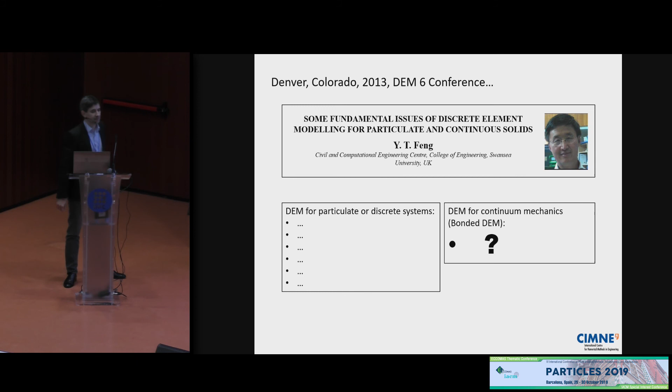But when he reached the part about continuum mechanics, the part which is solved by what we call the bonded DEM, he wrote a big question mark. He didn't talk much about that, just trying to say that there was many things to be developed there.

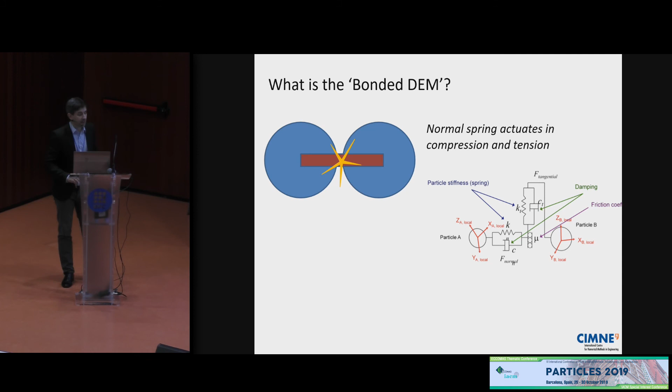At that time, we were trying to implement the bonded DEM in CIMNE. What is the bonded DEM? Basically you have the standard DEM with this typical model with normal spring, tangential spring, some dampers, and friction, but you also have what we call the bond, which acts in tension as well, not only in compression. Eventually it can break, and from that moment on you have the standard DEM. That's what we call, in general, the bonded DEM.

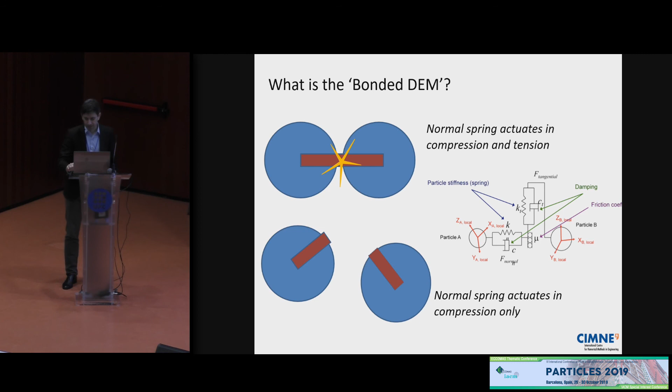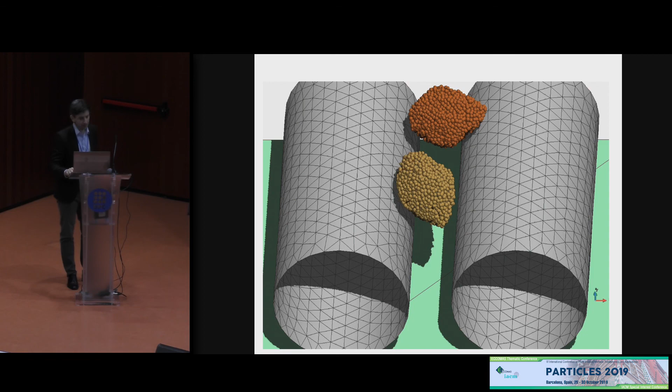It's useful to model things like concrete or solids that break and roll, so you have big displacement, rotations, and everything. You have contact, you have everything, but also you have the behavior of a solid before it breaks. We can break solids, and after that they break again, etc. So you can model crushing, etc. Those are some academic examples.

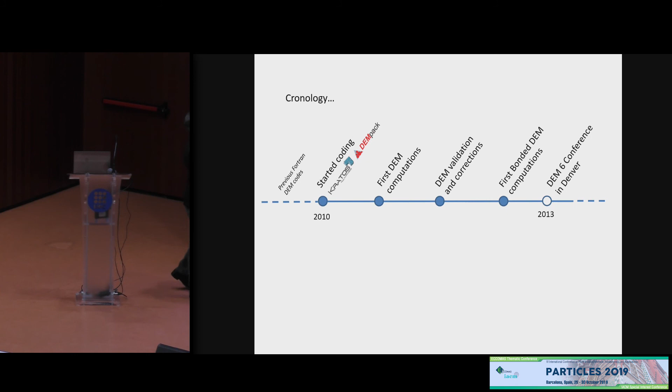The thing is that we had Fortran DEM codes at CIMNE previously. At 2010, we started coding a version of the DEM in the Kratos multiphysics framework. Then we did our first DEM computations. After that, we validated it, we made some corrections, and then we started with the bonded DEM.

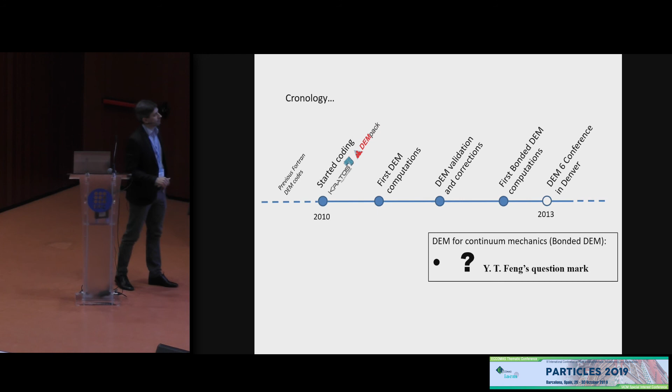That's when I went to Denver and found out that Professor Feng was very critical with the continuous solids simulation. That was the trigger. That made us question some things going on in the bonded DEM.

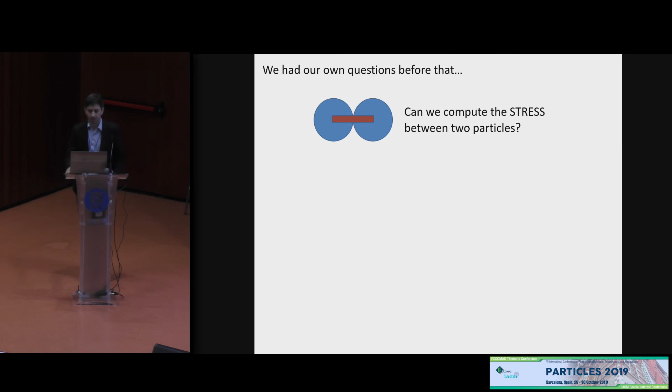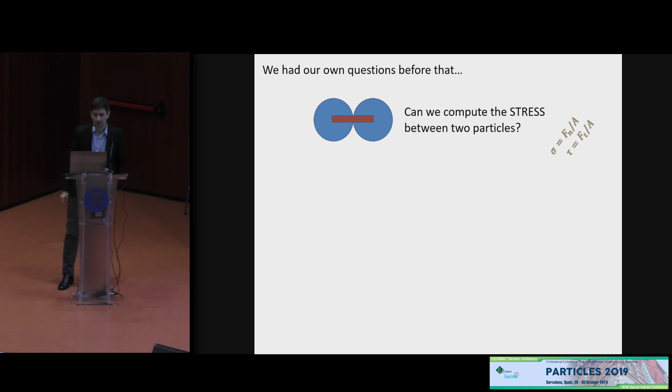What are some questions that we had before that time? We were questioning, can we compute the stress between two particles that are bonded? You can find in the literature many papers and books that say you can compute the normal stress as the normal force divided by the contact area, or the tangential stress as the tangential force divided by the area.

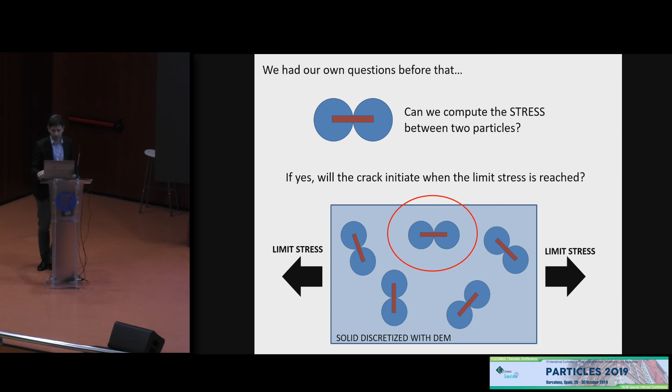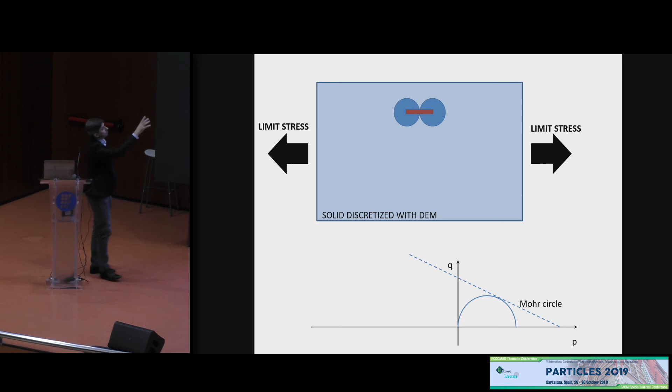But on top of that, if we take the same solid and draw the stress state as a Mohr circle, here you can see it. That's the yield surface for Mohr-Coulomb, and it's touching because it's the limit stress. The circle is tangent to the yield surface.

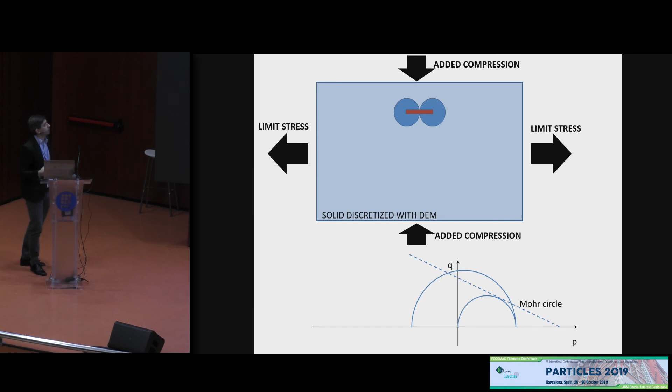But if you add some compression in a different axis, then you have a different Mohr circle. However, the DEM is not aware of that other stress in a different axis. So these questions were coming to our head constantly: how can we reproduce these complex stress states if two spheres are not aware of what is happening around them?

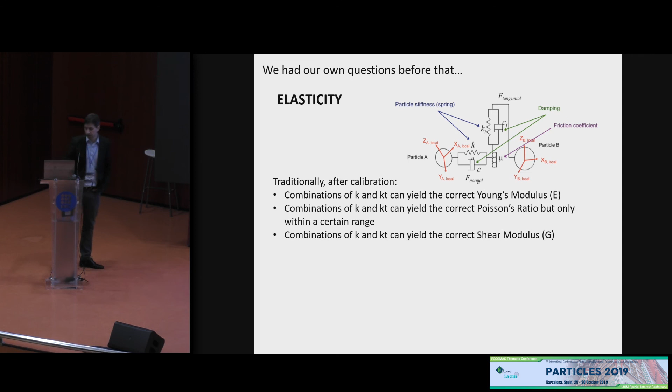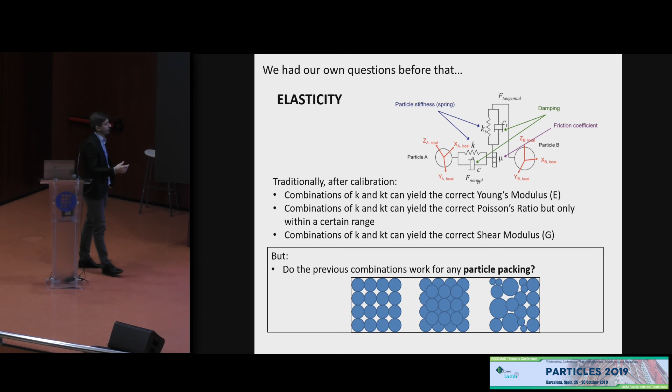However, do these combinations that you find by calibrating work for any particle packing? When I say particle packing, I'm talking about Cartesian packings, staggered packing, random packing, or any packing of spheres you can imagine. And in our experience, the answer is no.

Can those combinations of normal stiffness and tangential stiffness reproduce simultaneously the correct Young's modulus, Poisson's ratio, and shear modulus in different tests. So you do one test for Young's modulus and check it, and with the same calibration, you try a different test to measure the shear modulus. Does that work? And the answer, in our opinion, is no.

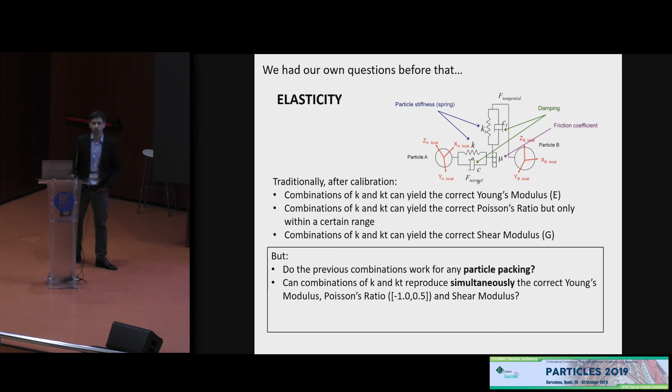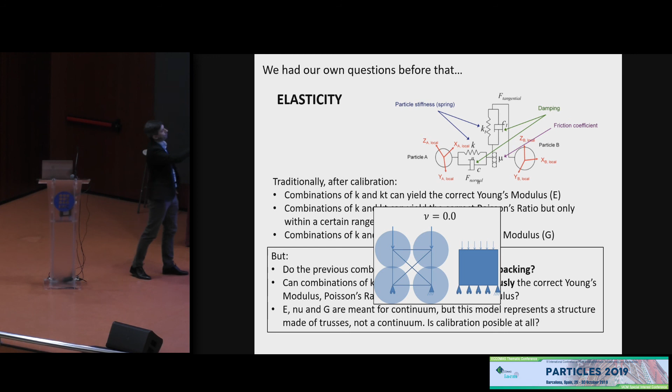Is a structure made of trusses - because the bonded DEM is actually a structure made of trusses - does that behave equal to a continuum? Our answer is no, and probably calibration is not possible. So you can reproduce some states, but not all of them.

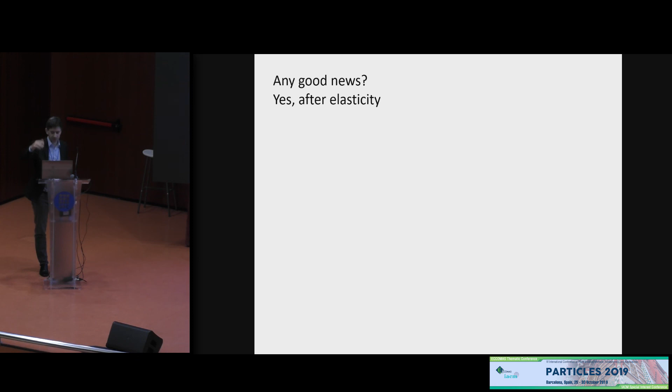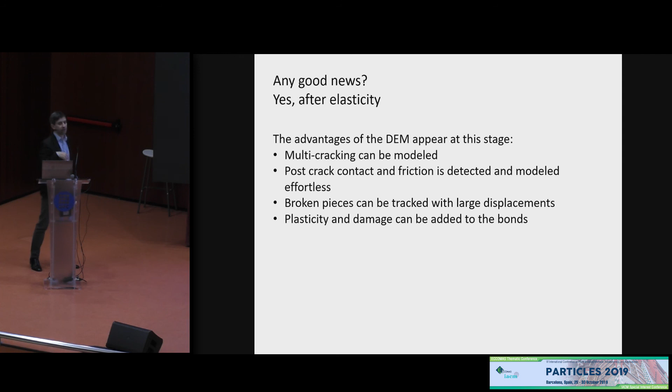So after that, are there any good news? We think that after the elastic range, there are very good news, because the advantages of the DEM appear at this stage. You can have multi-cracking, and after the cracks, the contact and the friction are detected very easily, and it works very well. The broken pieces can be tracked with large displacement, rotations, etc., and you can add plasticity, damage, whatever you want on those bonds. So we should solve elasticity as best as possible.

Of course, the cracks might have started at the wrong points due to a poor accuracy during the elastic region.

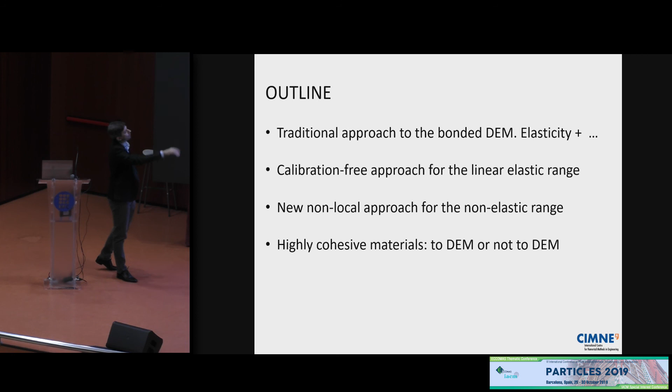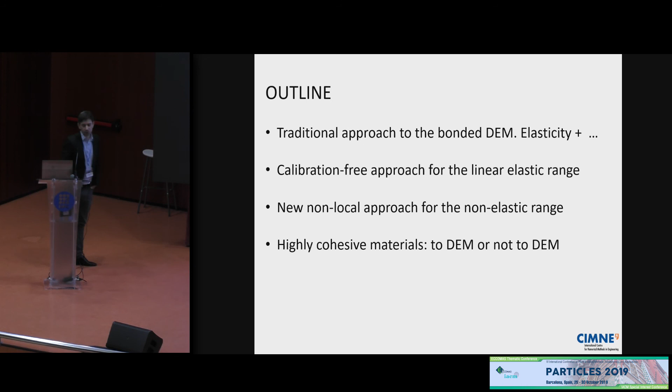Now, I will talk a little bit about the traditional approach to the bonded DEM, elasticity plus the rest. The first idea I want to give you is the calibration-free approach for the linear elastic range. The second idea is a new non-local approach for the non-elastic range, that means after the end of the elastic range. Finally, I will show some examples, and I will try to explain our experience about that.

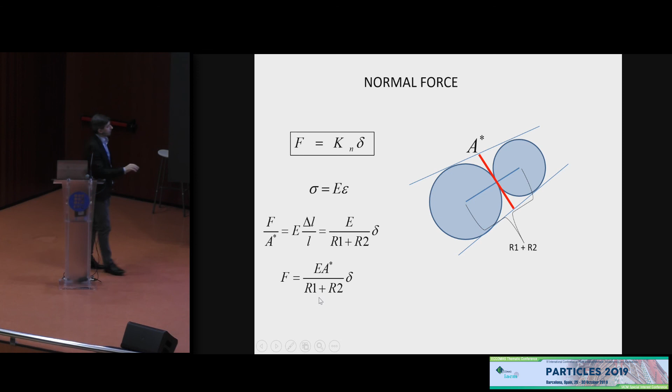So traditionally, we have two spheres. We have a contact area marked in red - that's a 2D simplification. Many authors, like ourselves at CIMNE, chose this equation of elasticity, which says sigma equals Young's modulus times the strain. And then you substitute - can you see? Yeah, the pointer can be seen. Finally, if you do all the substitutions, you get that the normal force is a constant - that's the normal stiffness - times the relative displacement, normal displacement.

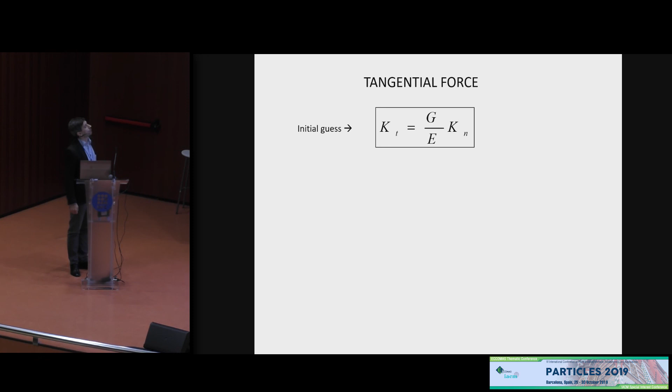Very often, you need to modify the Young's modulus, or if you're using a normal stiffness, to get the proper macroscopic Young's modulus. And what about the tangential force? Well, the first guess would be to use a tangential stiffness, which is the ratio between the shear modulus and the Young's modulus times the normal stiffness.

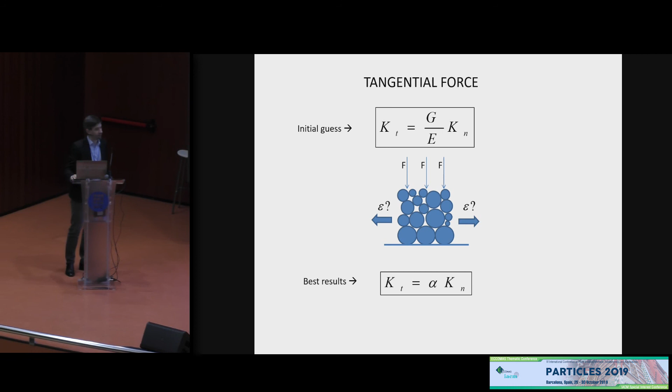But when you have a random packing, for example, and measure the lateral strain, best results are not obtained for that expression, but for other expressions where you have to adapt a little bit a coefficient, and then you finally get the correct Poisson's ratio. Watch out, because modifying the tangential stiffness can also change the elastic modulus, because there is some vertical component of the tangential forces, and then you're modifying the vertical stiffness. So that's dangerous.

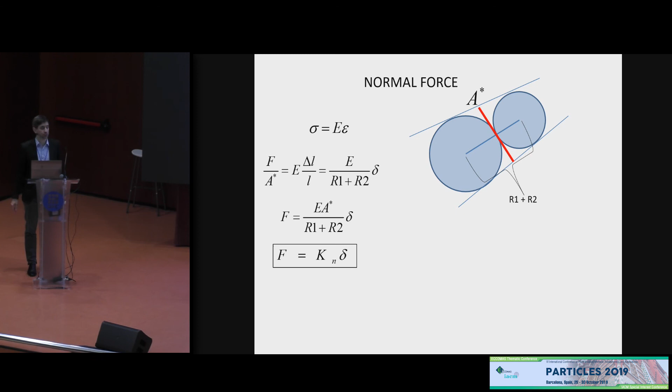Now, what did we do to solve these problems? First of all, we realized that the normal force strongly depends on A, the area. So if you choose a contact area which is bigger, you'll have stronger forces. If you choose it smaller, you have smaller forces. And the thing is that if you draw all the areas, you choose two big areas, you will have overlaps. That means that you are considering that portion of the domain several times.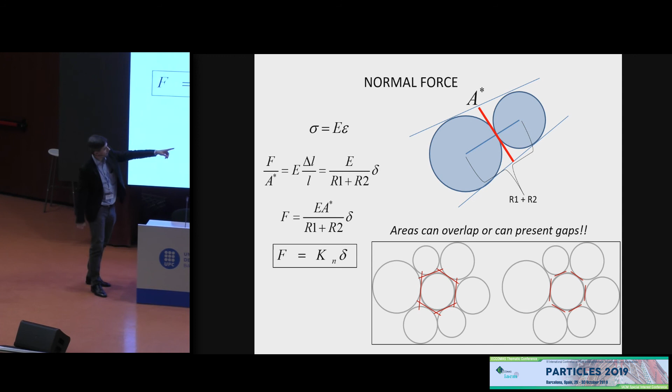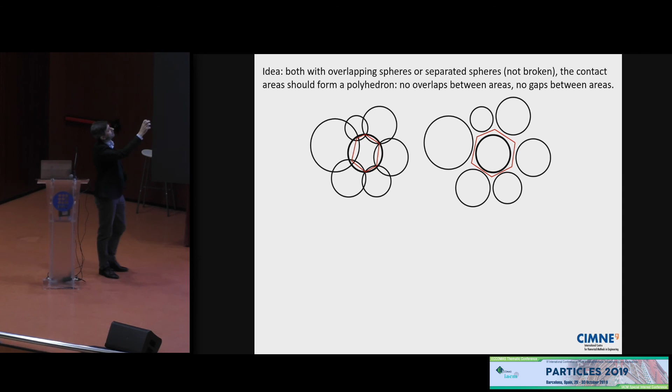And if you choose small areas, then you have gaps - that's like a porous media. We're trying to mimic a continuum right now. So the idea is that the ideal solution would be to have some areas that are touching, but they don't have overlaps or gaps. Even if you have indentations or separated elements, you need those areas not to have gaps or overlap. Our proposal is to use the weighted Voronoi diagram, where all these areas are not overlapping, and you have basically a partition of the domain.

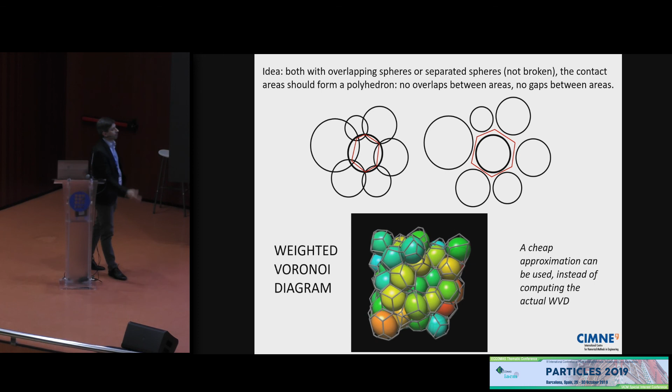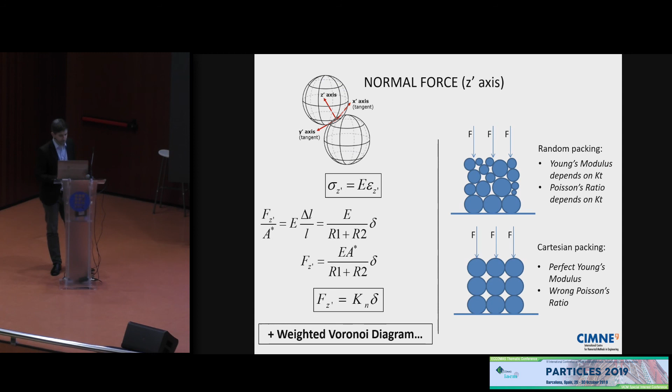We can also use a cheap approximation, particularly to reduce the costs. But conceptually, the idea is the same: try to use these areas as the area to compute the elastic stiffness. Now if you use this scheme and add the weighted Voronoi diagram to compute these areas...

If you use a random packing, you'll still get a wrong Young's modulus, because it still depends on Kt, and a wrong Poisson's ratio. But if you use a Cartesian packing, that's good news - you get the perfect Young's modulus. That's some beginning, but still a wrong Poisson's ratio.

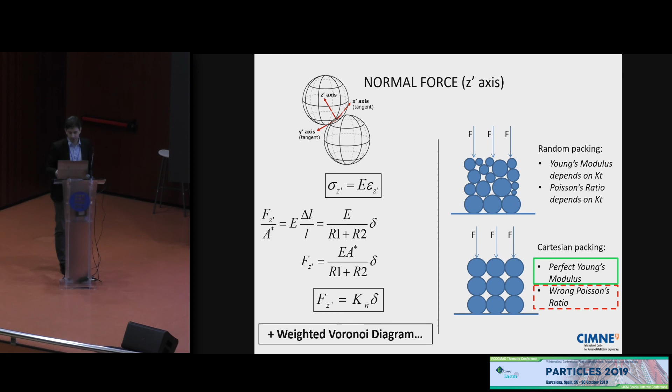So let's work on that red square. The idea is to change these equations, and instead of using a 1D elasticity equation, we will use a 3D elasticity equation, because it's a 3D problem.

Now if you do the same substitution, exactly the same step, you end up with a formula that tells you that the normal force between two spheres is something which is in the traditional DEM plus an extra term which depends on the stresses in the surroundings of that bond.

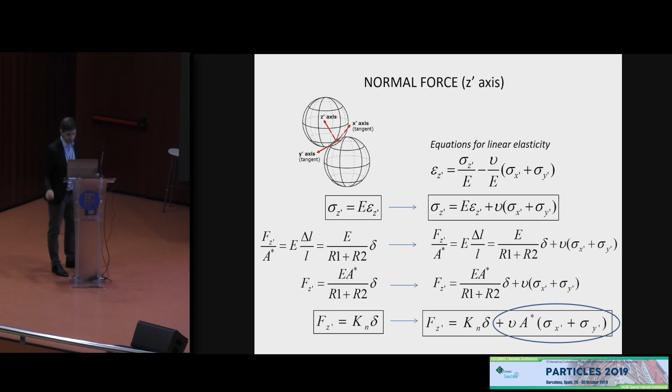And how can we fill that term? Well, the stresses are known. Traditionally in the DEM, they have been used to plot results. We have seen many talks in the particles conference, previous particles conferences, where people draw the stresses. So our idea was to use those stresses to feed that term.

And of course you have to project it, because you have to add the stress in this direction and the stress in this direction. So the global stress tensor, you have to project it to these directions using these formulas. That's only a projection in those directions, so you can fit the extra term that you have on top.

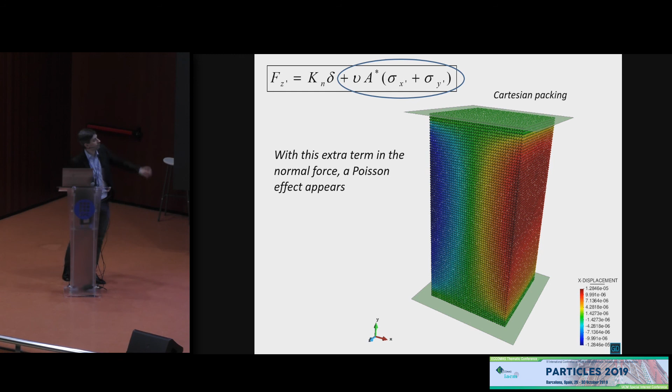Okay, when we did this with a Cartesian packing, we recovered the correct Poisson's ratio. That's the first time I see that, because usually in order to get some Poisson ratio, some lateral strain, you need to have always some random packing, or at least staggered packing. But that's done with the Cartesian packing - they are columns of spheres, and they are still expanding thanks to that term.

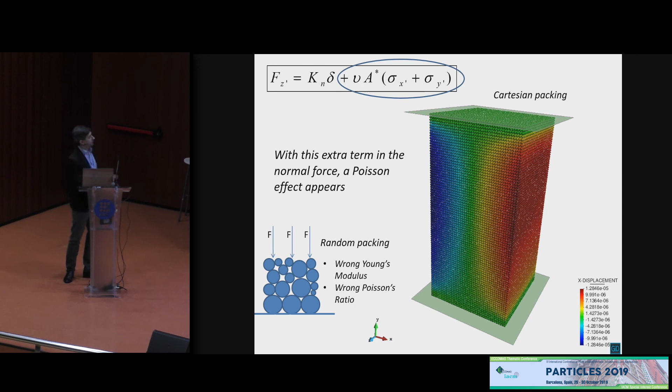However, for the random packing, we are still depending on the tangential stiffness. So we are getting a wrong Young's modulus and a wrong Poisson's ratio.

Well, let's do the same then with the tangential force. We take the equations for linear elasticity for the tangential stresses, that's the expression of the continuum, and we do the substitution.

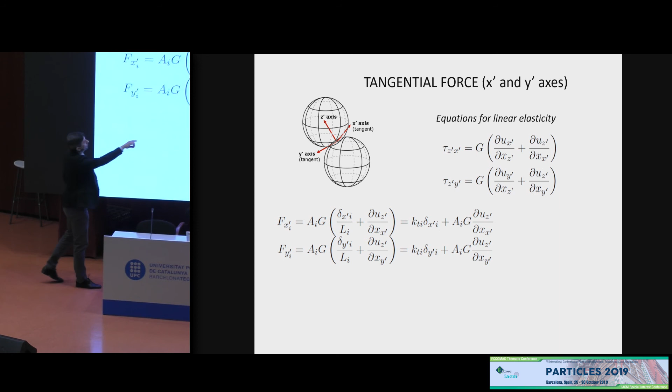Here we have that the forces in the lateral directions are some AG, and the two derivatives we are substituting in the same fashion that we do for the normal direction, and we need this term, the last term - these two at the end of the formulas - which are basically a measure of the shear strain along the bond, which is something that you cannot get from two spheres. That's impossible.

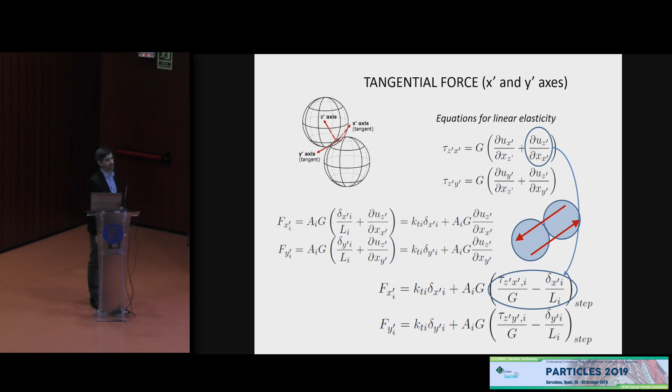So we feed that with the information coming from the stress tensor. It's the same idea - so there we substituted those derivatives, here is marked. Those derivatives are substituted by an expression which uses the stress tensor, which has a lot of information from the surroundings.

When we did this, we used the expression for the normal force with the extra term and the tangential forces with the extra terms as well. And also, here we realized that the Kt, the tangential stiffness, is not changing - it's fixed with the value of AG divided by L. Then we...

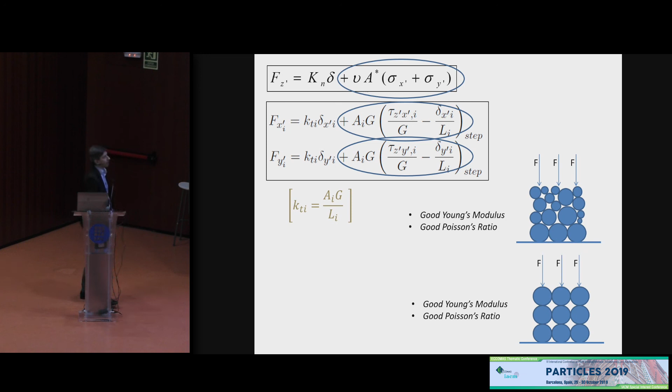...achieved what we wanted: a good result for the Young's modulus and Poisson ratio, for any packing basically - random packing, Cartesian packing, and staggered packing. Those are the tests that we did in the publication.

And we can see here, for example - let's see if the mouse works well - yeah, this error is what you get when you use the standard DEM, 100% error. But if you use the extra terms with Cartesian fine packing, you get only 1.5%. For staggered packing, you go from 43% to 0.4%. And for random packing, you go from almost 30% to 3%. So there's still some kind of heterogeneities that are putting some error, but at least we were very happy that we could capture those elastic properties without calibrating.

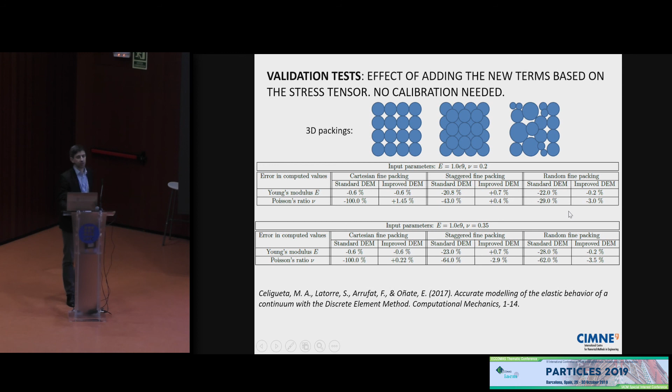So basically, you put the Young's modulus and the Poisson ratio in the formulas, and you're capturing the correct behavior in the bonded DEM. Are there problems?

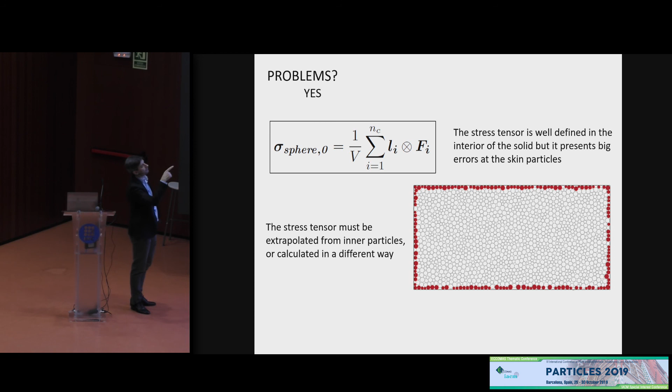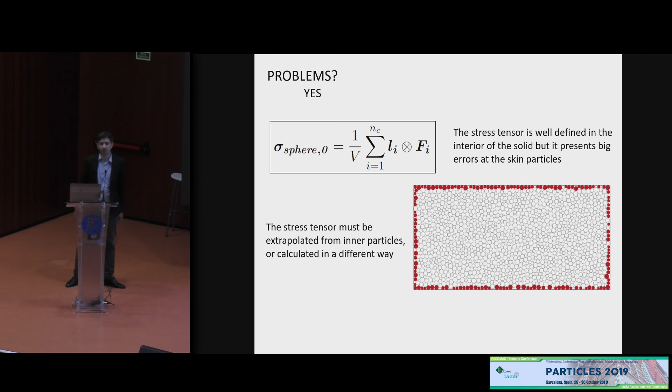Yes, there are problems. The stress tensor is well defined in the interior of the solid, but it has big errors on the skin, because it's based on the divergence theorem, and you cannot do the whole integral in the surroundings of one sphere which is in the skin. So you have to extrapolate it from the inner particles, or calculate the stress tensor in some other manner. Skin particles are problematic.

Some kind of heterogeneity can appear, though that's only about a 3% error that we have. And it has, of course, like most DEM simulation, a large CPU cost compared to finite element, for example.

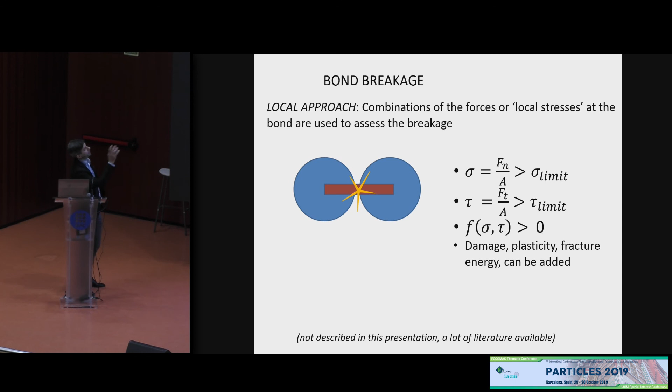Now, the second idea is about the non-elastic range. Usually, for breaking the bonds, we use the local approach. That means combinations of the forces or the local stresses at the bond, and you compare them with the limit. For example, you compare the normal stress to a limit stress, and if that's bigger, you break the bond, or a tangential stress, or a combination of both.

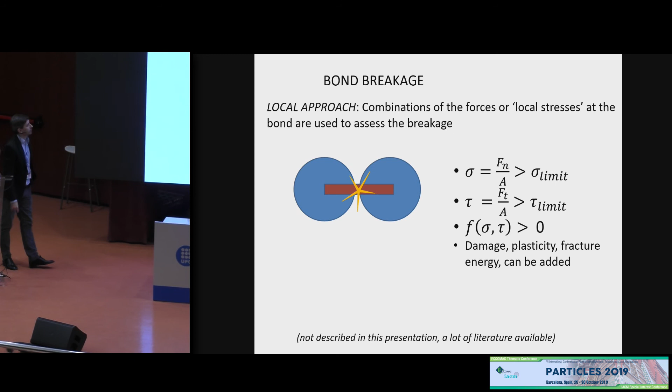You can add damage, plasticity, fracture energy—those things can be added to the bond, and that's pretty useful. However, our idea is to use typical yield surfaces from continuum mechanics, for example Rankine's yield criterion. Our proposal is to use a non-local approach.

The full stress tensor can be used. We have it—that's the formula I put before, and that's the value we are feeding into the forces formula.

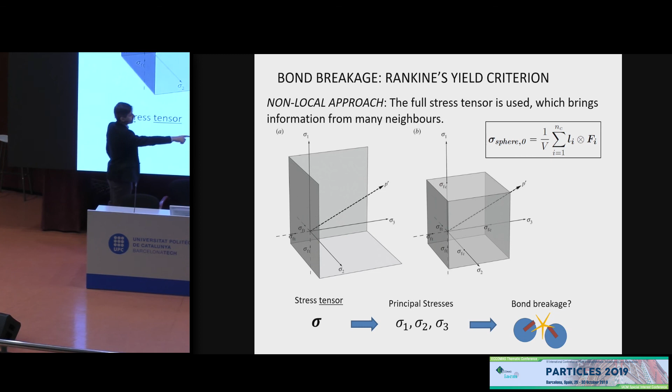So you have the stress tensor, you can compute the principal stresses, and with the principal stresses you can assess if you are inside or outside the yield surface. Those are two different expressions of Rankine, with a limiting compression and a limiting tension.

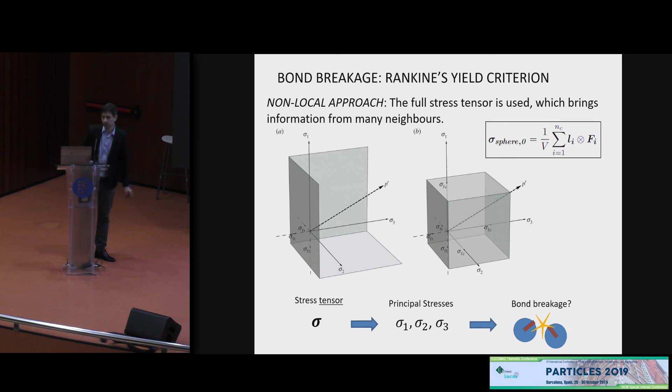But the thing is, with those principal stresses, you can say if the bond is breaking. This is a very simple idea, but...

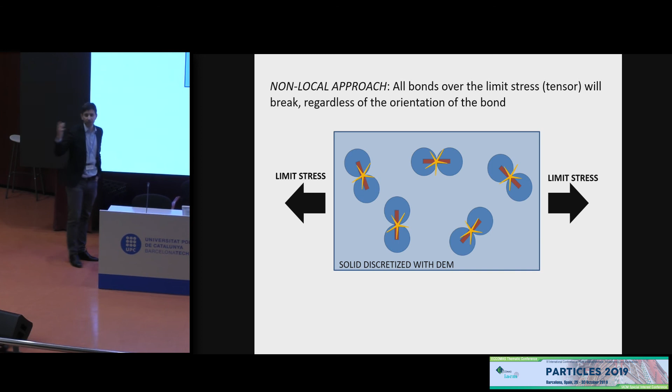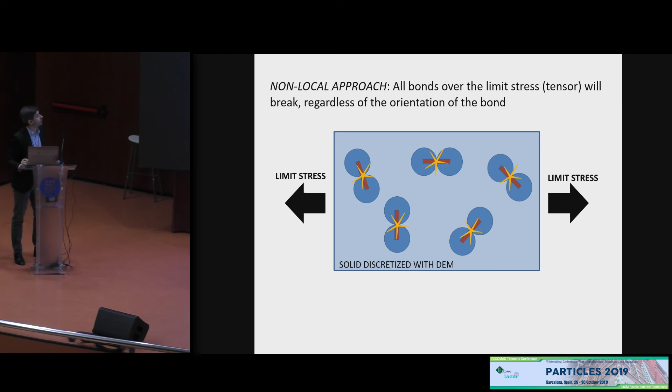if you put the solid under limit stress, all bonds should break at the same time, regardless of the orientation of the bond. We said at the beginning that orientation was important when using local stresses along the bond, but here, using the stress tensor, it doesn't care about the orientation of the bond. So all of them, apart from heterogeneity that could appear, can break at the same time.

Those are some validation tests we did, with uniaxial compression strength test, the Brazilian test, and the shear test. The results were quite good after calibrating just one parameter.

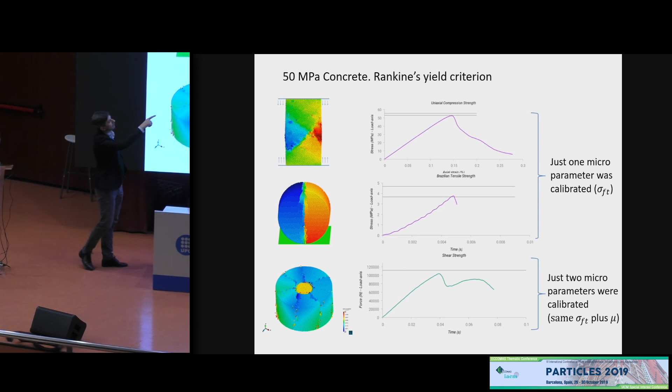For the UCS and Brazilian test, we only needed to calibrate one parameter. Elasticity was done correctly, automatically, and the limit stress for the Rankine yield surface had to be calibrated, and after three or four attempts, we got it.

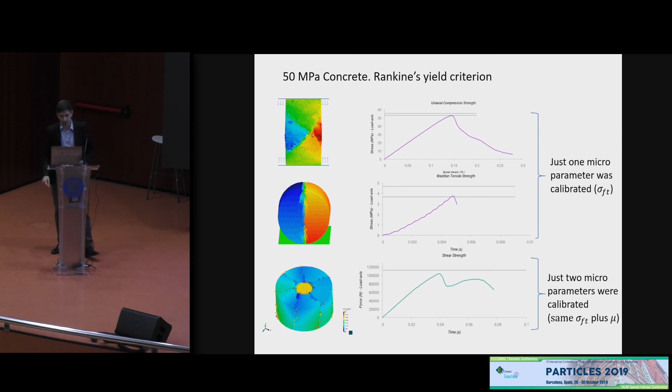However, this is a very frictional case, and we had to calibrate also the friction between particles, using exactly the same value for sigma ft that we were using for the previous calculation. That was very good news.

But we said, okay, if we can do this with a Rankine yield surface, why not Mohr-Coulomb, Drucker-Prager, Tresca, von Mises, whatever you have used traditionally?

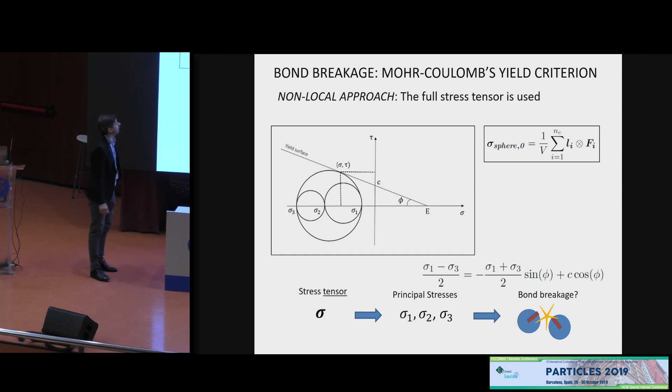Well, we tried Mohr-Coulomb, and the concept is the same. You have this yield surface, you have the stress tensor at the point, you take the principal stresses, you can operate with them and assess if the bond is breaking.

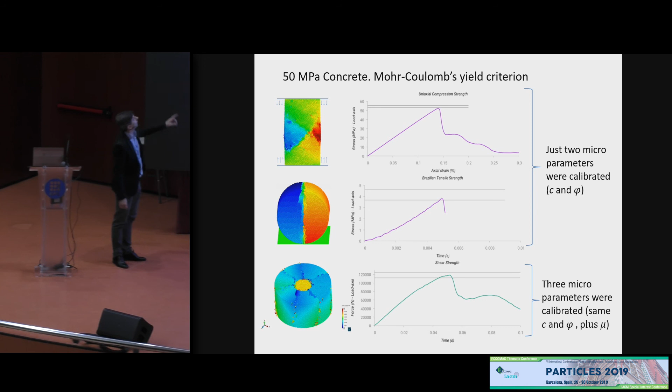Then the same thing—bonds are breaking regardless of the orientation. Those are the results comparing with experiments for the same three tests. But here we had to calibrate two parameters, C and phi, for Mohr-Coulomb, and a third one for the friction of this case.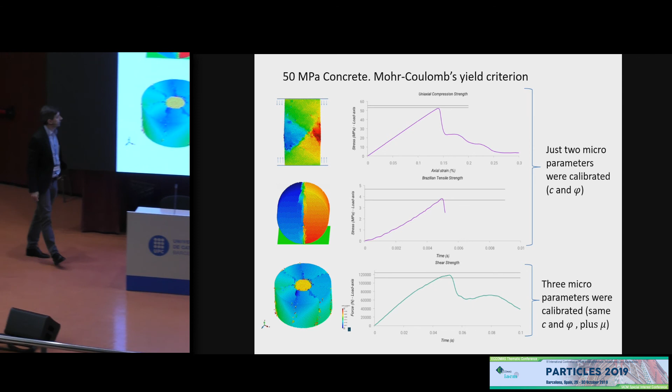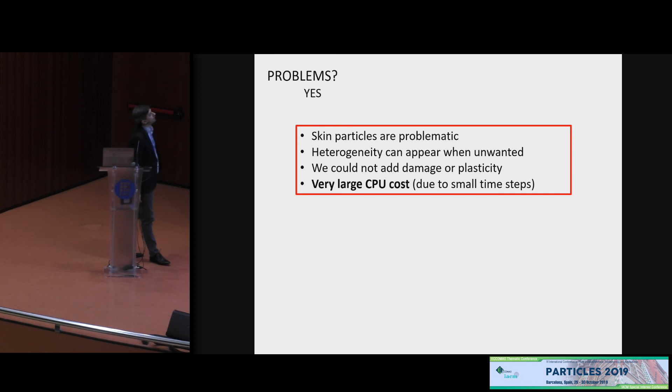Does this have problems? Yes, also. The skins are still problematic. Heterogeneity can appear. We could not add damage or plasticity to this approach so far, and it has a very large CPU cost here. So can we apply this to the problems

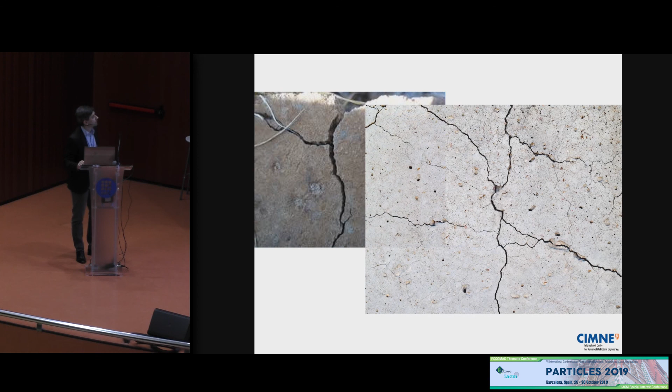where we have highly cohesive materials involved, like rocks, concrete, or sandstone, whatever? Our proposal is that we have two options. We can use DEM as a discretization method, like we said, equivalent to a Voronoi tessellation.

Particles are just a partition of the domain, usually a lot bigger than grain size. You can have particles of the size of 10 centimeters when the real grain, the actual grain, is 1 millimeter. It's usable for continuous materials, and this method is used to detect formation and evolution of cracks and beyond, the contact, friction, etc.

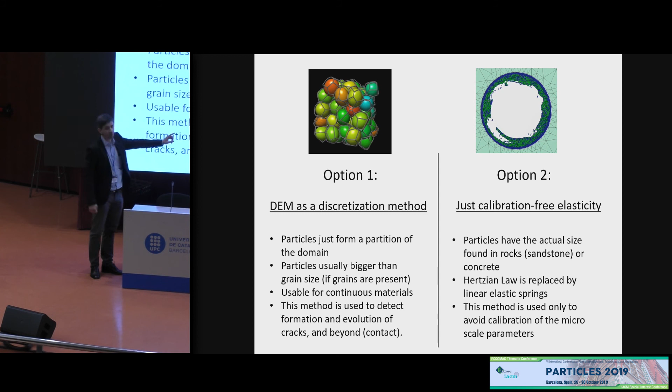The second option would be a different approach where you have particles that have the actual size found in rocks, like, for example, sandstone. And you replace the Hertzian law, which is the most known law for DEM, by linear elastic springs. The good thing is that then you avoid the calibration for the elastic range. So this is one option also that we propose.

For option 1, for example, this is a 3-point bending test of a concrete beam, and you can see how it's breaking. Here we used automatic calibration for elasticity, and we used Mohr-Coulomb's yield surface.

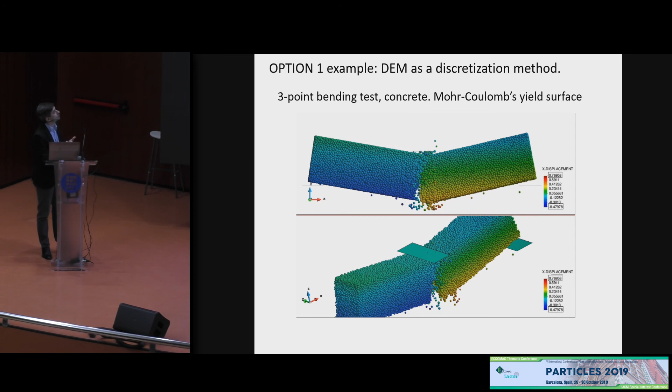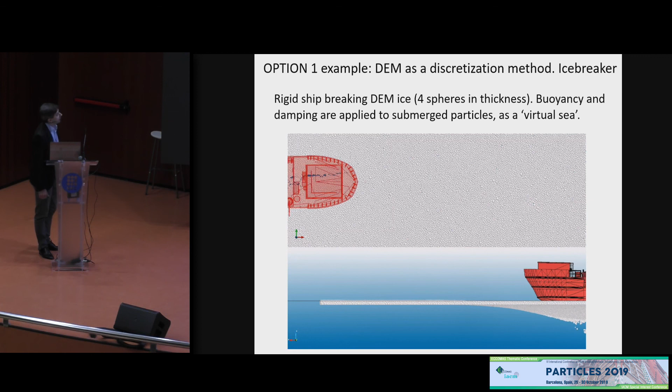Here we have an example of a ship, which is an icebreaker, and we added some buoyancy to the spheres. You can see how there is a certain thickness of DEM, that's bonded DEM, and here the breakage was assessed by a Mohr-Coulomb approach.

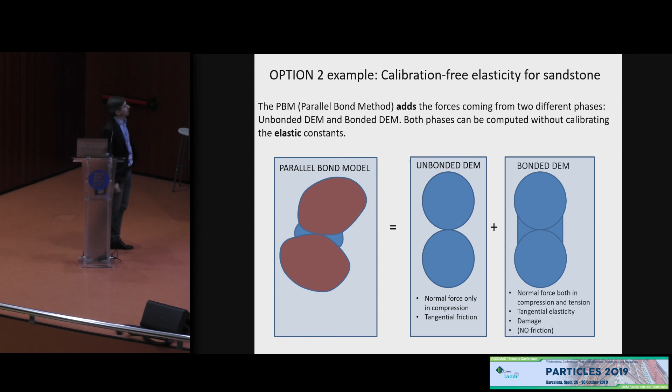For option 2, where the size of the spheres is the same as the actual grains, we developed the parallel bond method, which is a known method already. It's published and is also present in some commercial codes, which is based on parallel phases of DEM. On one hand, you have unbonded DEM, which is the skeleton.

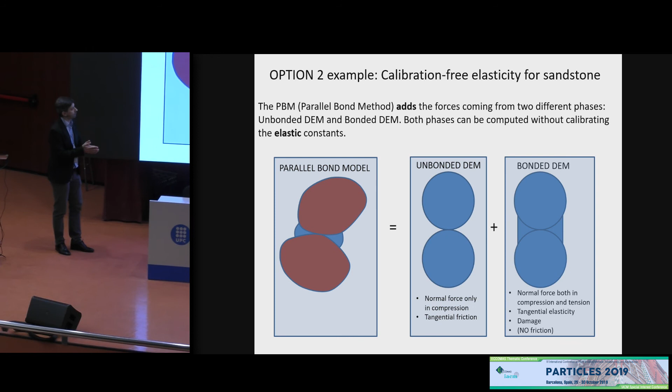Rocks are touching, the grains are touching with each other. And on the other hand, you have a bond on top of that, which makes them a cementitious material. And if you do that, you can add also the concept of

fracture energy. And we did some triaxial tests. This is not the scope of the talk, because the scope was to transfer the ideas to you of what I said. But we have here a shear band where we are using high strength limit and a certain fracture energy.

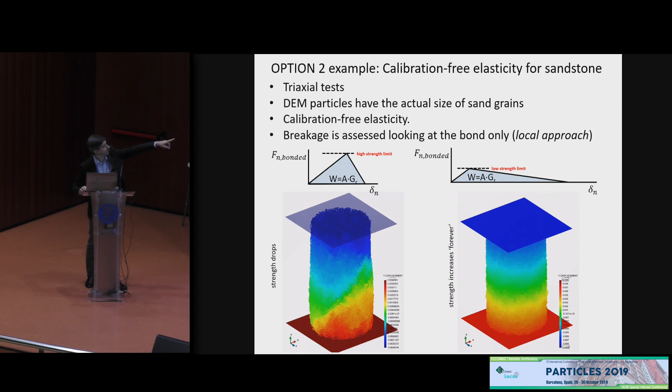But if you keep the same fracture energy and decrease the strength limit, then you don't have this shear band, because the material gets very ductile, very like chewing gum, say.

This is an example of option 2. This is a ring made of sandstone, which is coupled with an FEM simulation. So these particles are glued here, so they are moving with the same displacement exactly. And we are compressing the whole domain from the finite elements and try to see how much of this ring is broken and detached from the ring.

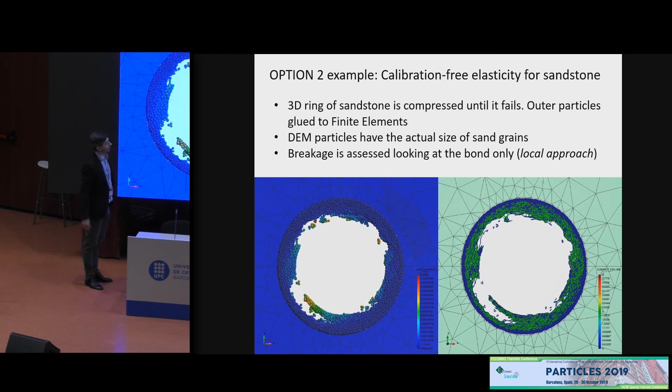And breakage is only assessed looking at the bond. Here we are not using the stress tensor for the breakage, but we are using the stress tensor for the elasticity. So elasticity is calibration free, let's say, and we have here these chunks that are leaving the domain, this chunk which is almost leaving the domain, and there you have the bonds that are reaching the limit.

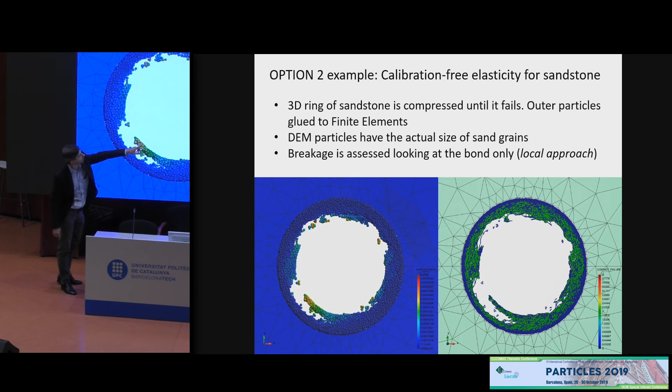So these are basically the conclusions. This bonded DEM solves problems which other methods cannot. The bond breakage can emulate micro cracking. The cracks can develop, join, bifurcate naturally. Then you have contact, then you have friction. You can add as many parameters as you want, like the rolling friction, rolling resistance.

Material heterogeneity can be applied easily. You can change the properties of each particle. Broken pieces can break later on, that would be the crushing effect. And we can limit calibration effort to FEM standard. That's probably the main idea I want to transmit.

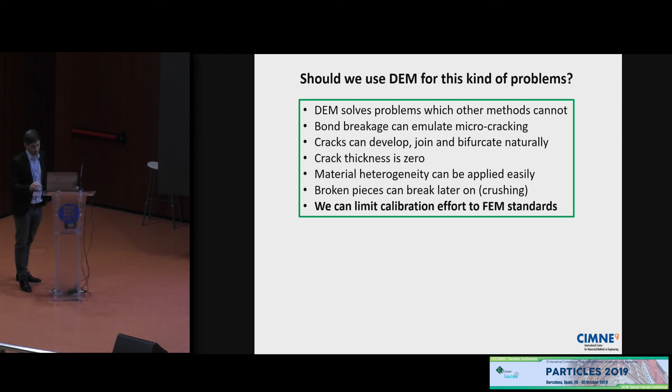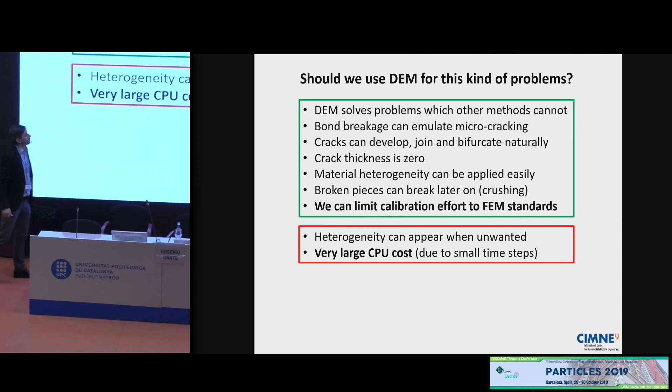On the other hand, we have the problem with the heterogeneity that can appear when unwanted, because the packings can be very random. They have defects, they have pores, they have voids, and also a very large CPU cost. Not due to a big number of particles, which is true as well and can be solved with supercomputers, but the problem that we are facing most commonly is the small time step. We have very rigid materials, we have very small particles, and the time step is getting really small. So for us, this is the worst problem of the DEM. The rest, we are very happy with that.

So use at your own risk. And that's all.